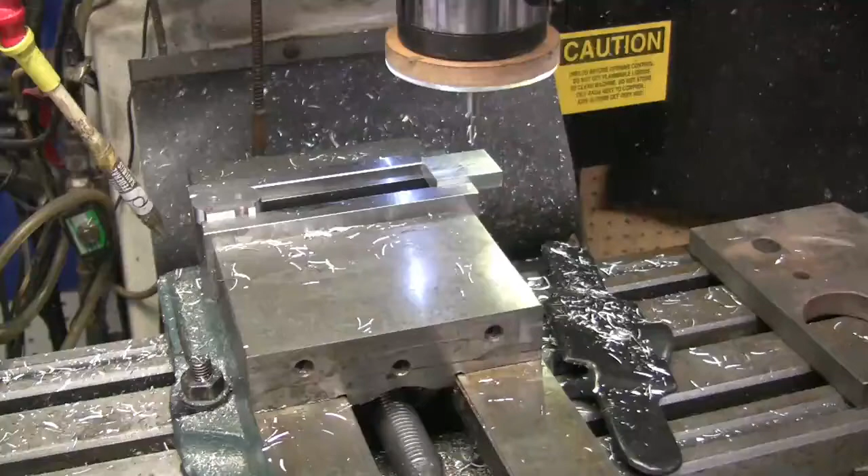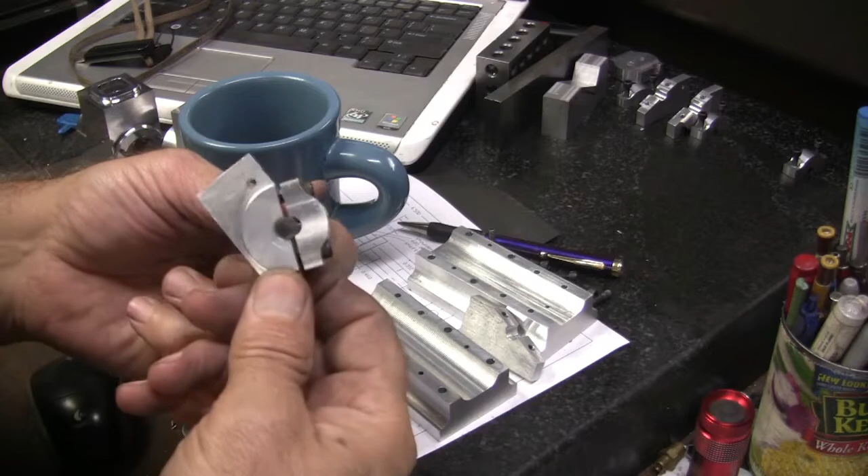Okay, I have the right screws here, everything tapped, and a 5/16 piece of drill blank here. I clamped it in this one, and I marked them all. I scratched lines underneath here so I know what goes where.

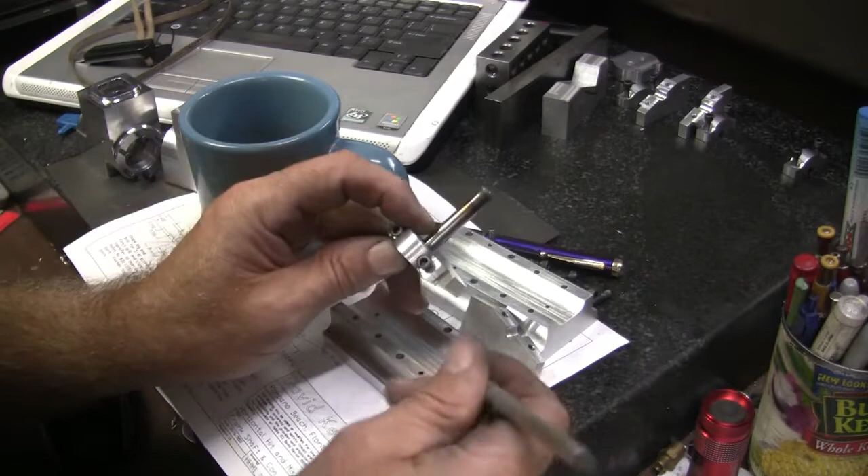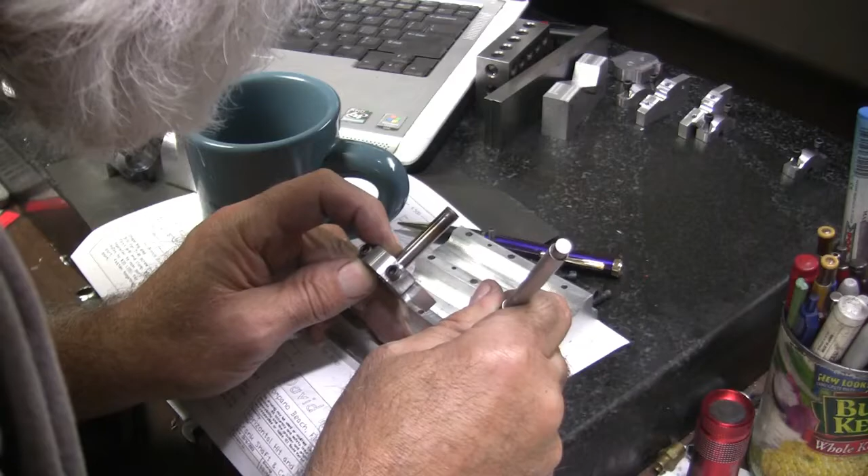This is number 2 right here, and I'm going to scratch the same thing right here. All I'm going to do is make a couple scratch marks for number 2. And then this is number 1 over here, so that way I know where they go.

What we'll do is loosely put this one together, this side. If I can hold onto it and this at the same time... I don't want it tight, I just want it loose until I get the alignment done.

And what's going on here is the 5/16 dowel or drill blank is getting pinched into the half diameter by the cap. Okay, so we'll do the same thing on the other side.

Let's slide it into place, and I'm going to just loosely attach that one. This is just to align them up before line boring through them. I'm not exactly sure how I'm going to do that yet.

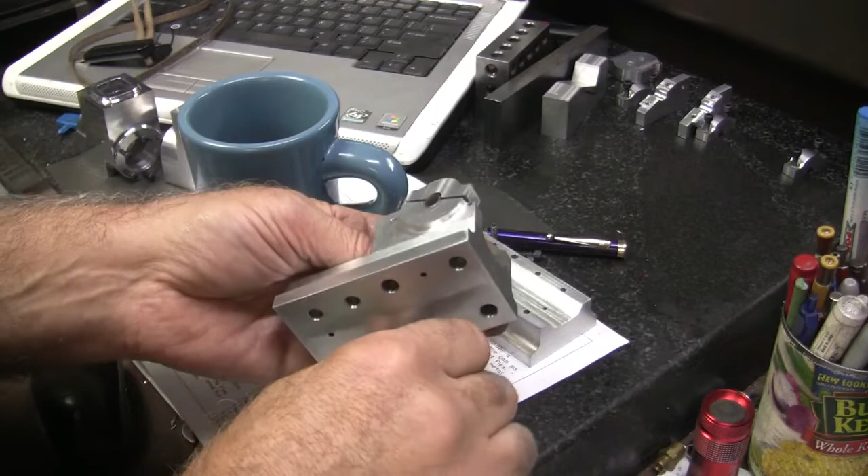I might just take, I don't know if I can use a boring end mill, an undersized 5/16 end mill to go through there, or not 5/16, that'd be 437. An undersized 437, and then ream it up to size, line ream it.

Alright, so that's loosely clamped, so I can still wiggle it around just a little bit. And I did the same thing with the caps. I put a line underneath here to mark it, and a line right there to mark it, so I know that the cap goes on this way right here.

It tells me where it goes and which way it goes, so that I don't flip it 180. And what I'm going to do is snug the caps up first. You know, snug them up first.

And that'll align everything, theoretically. I don't know why it wouldn't, unless the pin was bent. Okay, so now that's lined up somewhat, and I'm going to tighten these up.

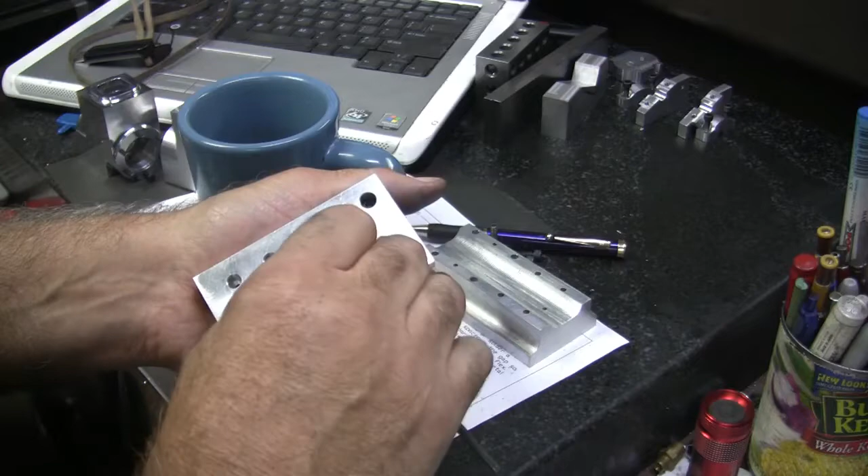And I did make an allowance for the dowels to put in there, but I'm not sure if I really need to. I don't think I do, because once I get it line bored and reamed, all I need to do is put a 437 diameter pin in there to line it up, or the crank to line it up, and then tighten it up.

So that one's lined up. So now I can take this, loosen this up, loosen the cap back up on both sides.

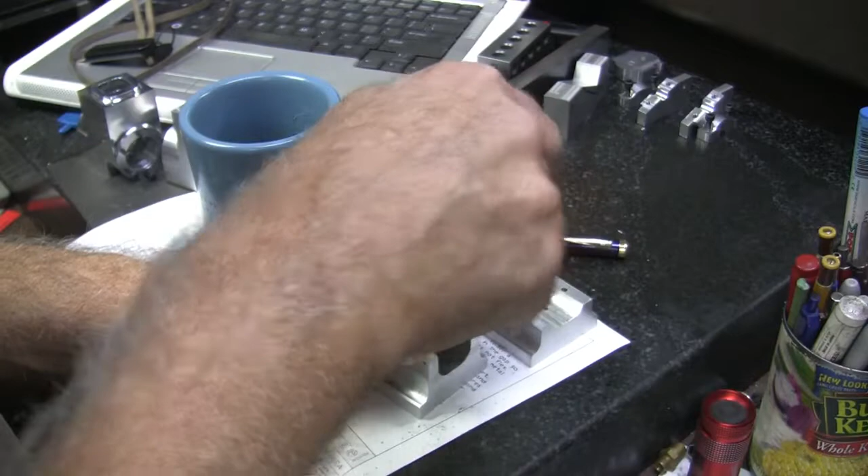It should just come right out of there. Raise that up, raise this up, raise this up. It's loose in there, but it doesn't want to slide out. There we go, slide out of there.

All right, now we'll tighten this up. Okay, we'll tighten them up.

All right, this one is ready to be clamped up. I'm wondering, I should have probably left that in there and went to the mill, but it's not going to matter if everything is square to that. It'll be fine to the square of the side.

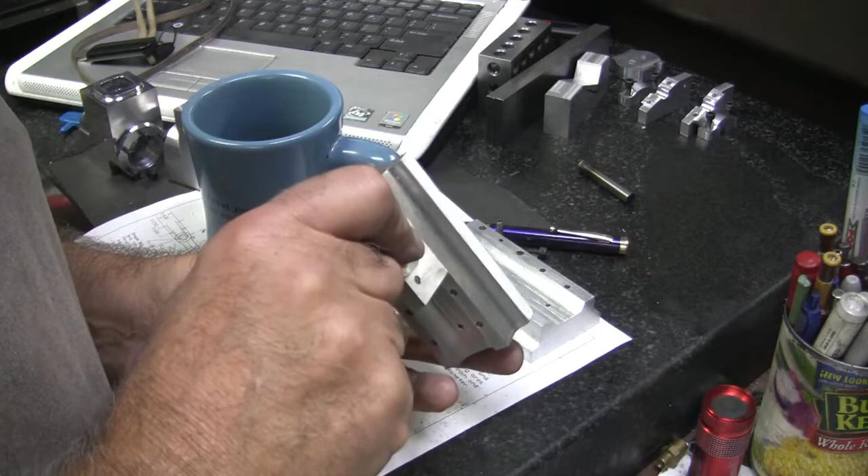Matter of fact, these are parallel, so I can just set it on a parallel and come in here and clamp with a couple blocks, clamp it up tight, and then bore.

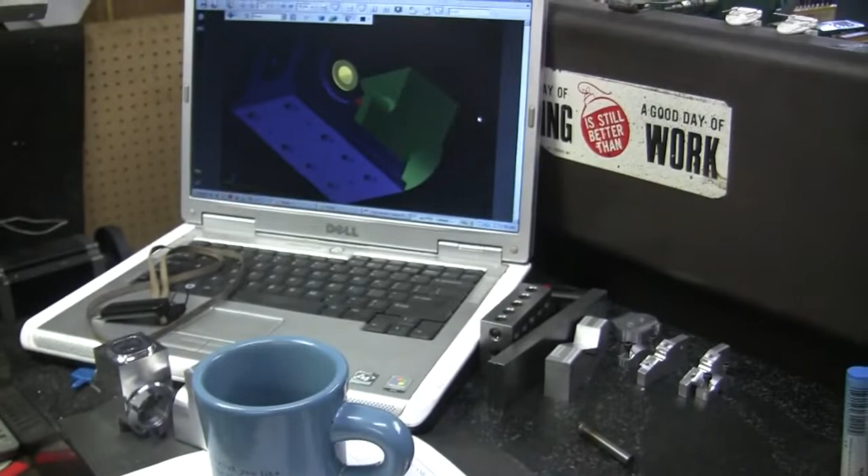I can actually come over my dimension now, and it should be in the right spot. Come from here over, and then there up. I can get that dimension off of my CAD model anyway. This is just a 3D PDF right here.

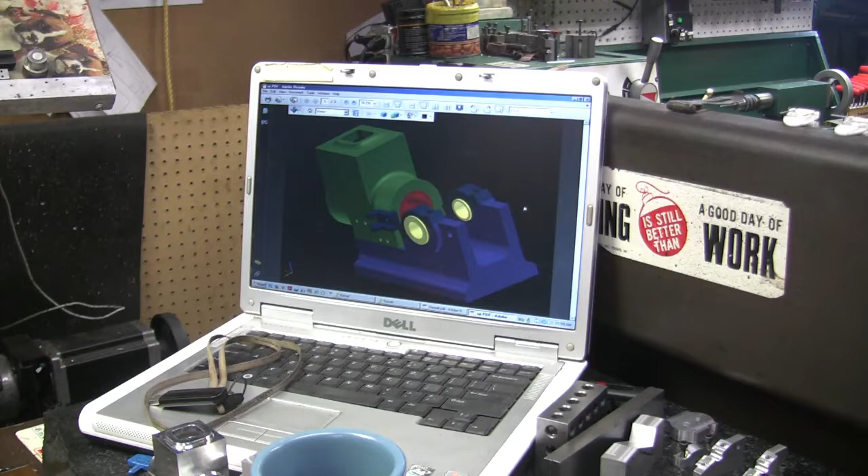And I've gotten it further than this now. I've got the model just about complete. I have the crank, the piston, the rod, and everything else. So this was done - I did this 3D PDF back when I first started modeling it out.

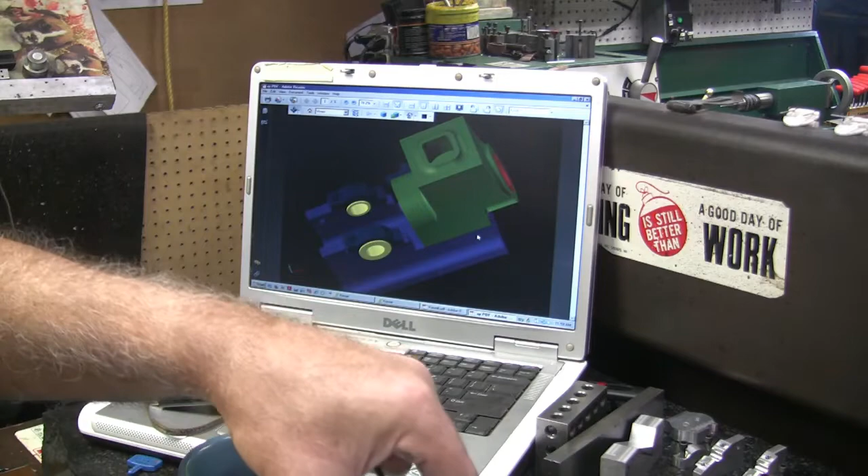So anyway, I think it's going to look pretty cool, pretty nice. Once that gets put on there, I think it's going to look nice. Yeah, the cam - I believe the cam fits right there.

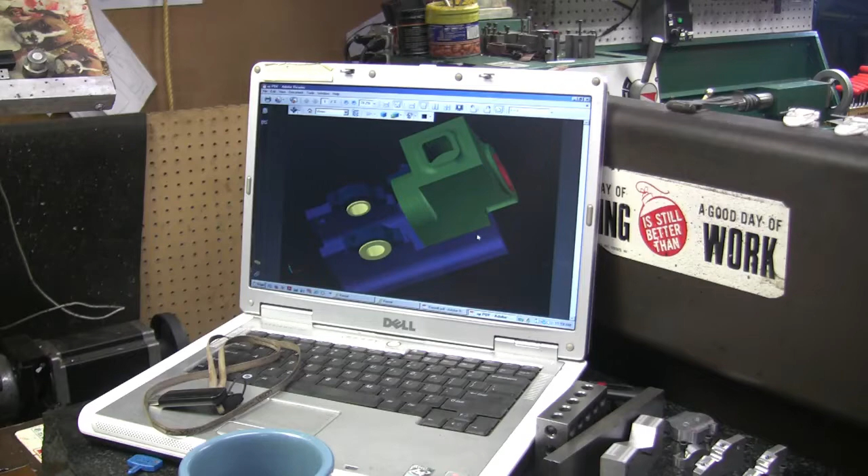So, but yeah, I'm going to set it up in the vise. Let's go over to the mill and see how we can set that up. See how well it fits in the vise here. So I should be able to just drop it down in there.

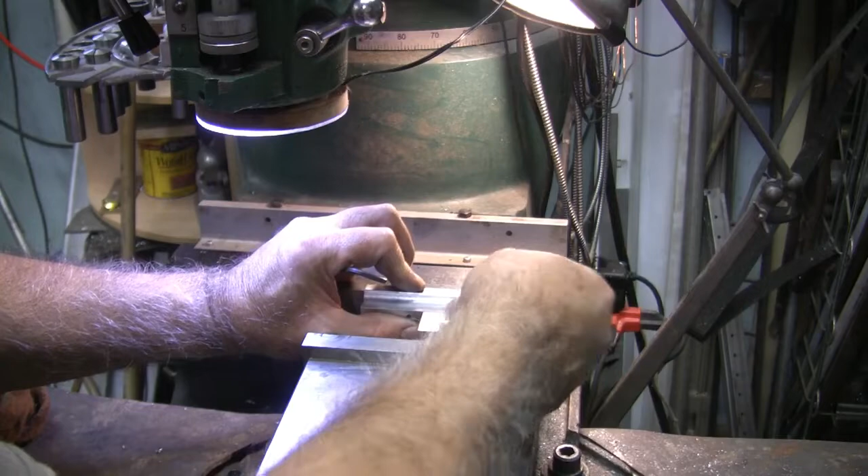Should be able to just drop it in there and catch the back side so I can go right straight through. That could almost just clamp it like that, but I don't want to be pushing on the journal at all. I'm going to get a couple blocks made so when it's clamped it pushes in here. I'll have a block here and a block over here running alongside to catch this edge. So that's what I'm going to do.

I'm going to whittle out a couple blocks and get it set up here. Once I get it all set up, I will be back, and more than likely I'll take an undersized one.

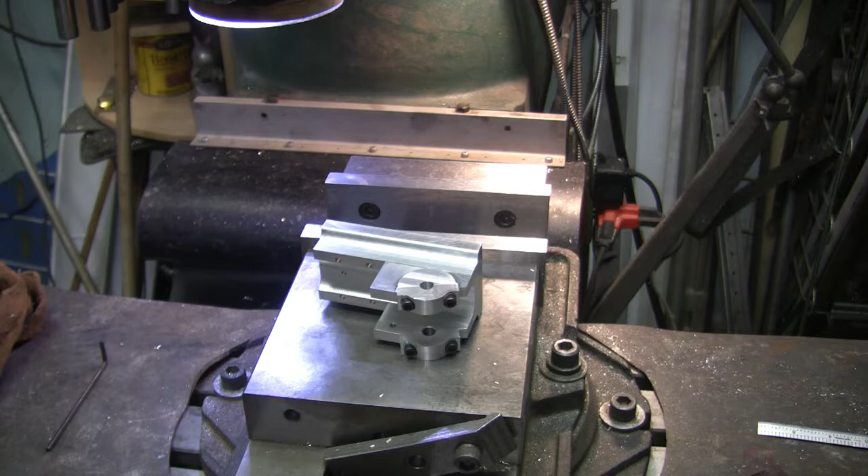Half-inch. I don't know if I have an undersized one that's that far under. Let's see what this one is. I could quick sharpen one, I guess. I got a 480. I could quick sharpen one and make it what I want.

I didn't really want to dig out my sharpening table - I basically have my machines set away, so... well, this one here is 390, so I could start with that, and that'll go all the way through.

These are boring end mills. They're tapered from the face down, so they're smaller up here than they are out on the face, so they don't rub. You sharpen them, you just sharpen the end, and that's it. It's boring end mills.

Let's see what else I got. Ah, here's a 400. I don't know if that'll make it though. Nope, not long enough. 400 would have been, yeah, that's still - I would have had to double ream it if I had.

I'm glad I looked at the drawing one more time. But we're going to have to go with the boring head anyway. I am going to open it up to a half inch. I'm going to run a half inch end mill through there to open it up.

And then we'll put the boring head in. We'll probably have to drop the knee, and take the last 62 thou out. Hopefully that'll work.

I don't know if I even have one - well yeah, I must have a 9/16 reamer. I don't have anything in between, I don't think. So there's no way I'd be able to run that through.

As far as size-wise and location, doesn't really matter. 100, 200, 300 - going about 300 thousandths down.

I don't know what you're looking at because I just moved the camera. So we'll take a look here as I get the tool in. Yeah, you're not looking at anything. Okay.

Now we're going to run in high speed, but not at the RPM that I'm at - I'm going to drop it down one. Which would be... what is that? 1, 2, 3, about 850. We're going to run at about 850 RPM.

And feed per revolution, it's set at 2. I'm going to be cautious and set that at 1 - be really slow. Set my stop, and back that off. I'm going high. And back the boring head off.

At 5:32, so I'll go another 20. I'm sneaking up on it. All right, 5, 10, 15, 20. Yep, I'm on the mark. It's hard to read those marks on that thing.

Okay, sneaking up on it.